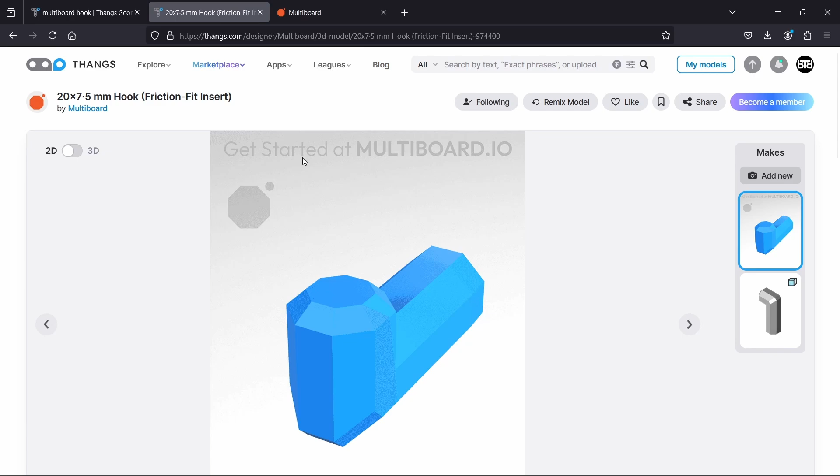I have wanted to get back into the multi-board project for a while now, but I've been sort of stuck with analysis paralysis, which is silly because it's a multi-board. You can always change it. So we're going to go into Fusion 360 and we're going to remix some things today. And so to start with that, I need a hook. I need the backside of the hook where it interfaces with the multi-board actually. So we're going to download that.

And I'm going to combine it with an SD card adapter so that I can store some of my SD cards. So I'm just looking at some different options. This one doesn't have enough cards in it. This one's kind of interesting. That open back slot is interesting. I'm not sure if I want to use that. I'm leaning towards this one because I've used it before and there are different tightness levels. So I can pick one, go with it, print it, see if it works, and if it's a little too loose, I can come back and make adjustments.

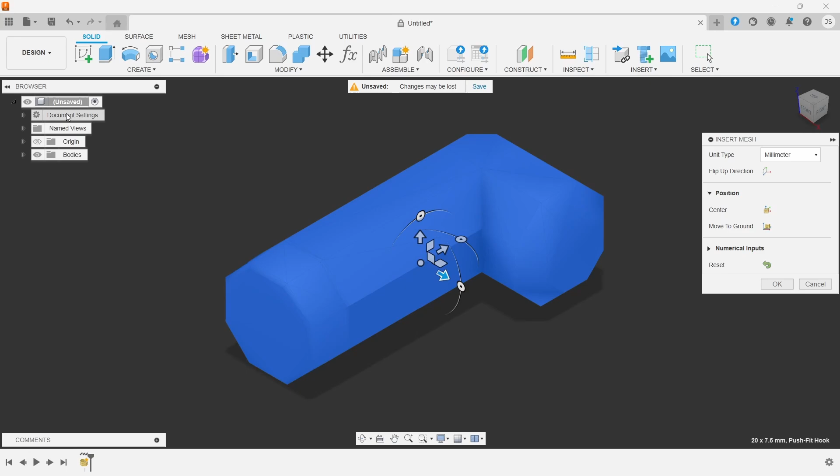So we're going to insert mesh, as we always do when we're trying to bring STLs into Fusion 360. Select from my computer, and we're going to start with the hook. So I'm going to grab that and get that into the workspace. And I always use center and move to ground. And I'm looking at it in the orientation. I want to go into document settings, and I can't while this dialog is open, so we'll do that in a second.

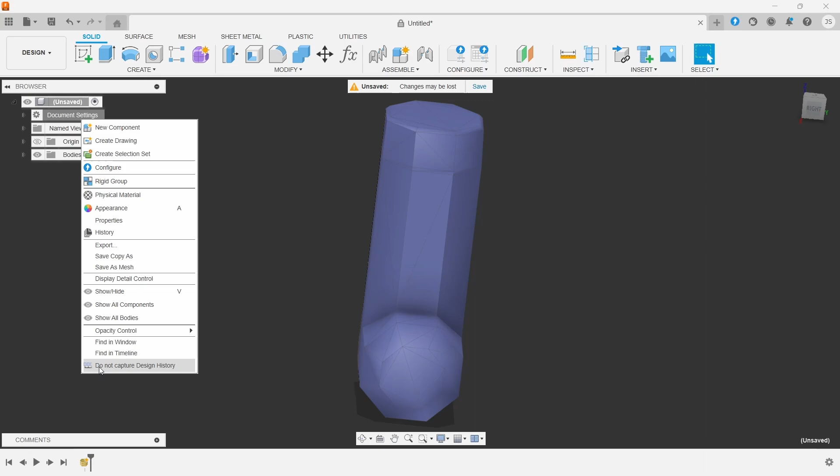Looking at its orientation in space, I already have kind of an idea of how I want this to work. So I'm going to change the orientation of that by using the handles. And now you can see the hook is standing straight up and down, which is what I'm looking for here. So we're going to bring that in, and then we're going to go double check the document settings, make sure that capture design history is on, and you can see that because you have the design history at the bottom here.

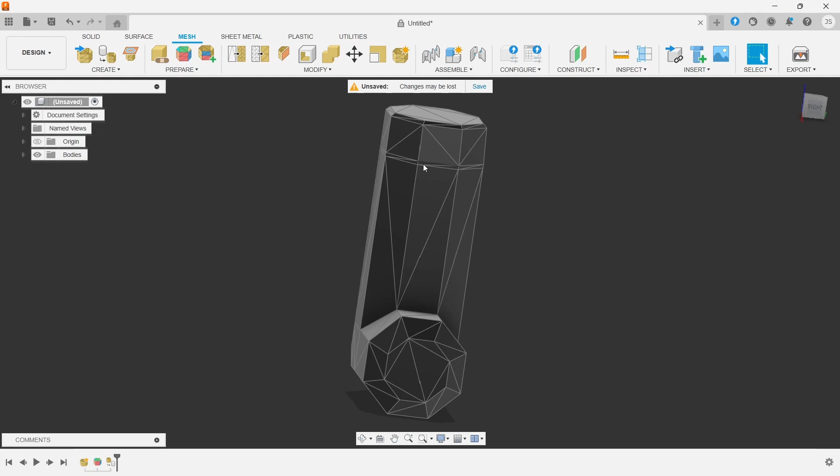So we've got our hook, and now we're going to go into mesh and create face groups. Okay, and then we're going to go into modify and convert mesh, and that's our normal workflow for getting a part into Fusion 360. So now I can edit it, I can cut things off, and I can do what I want. This little feature here is about how far it should push in to the board. If I recall correctly, that's how Jonathan designed it. So I'm going to use that as a guide for how deeply I'm going to cut this thing, because I want it to be fairly close.

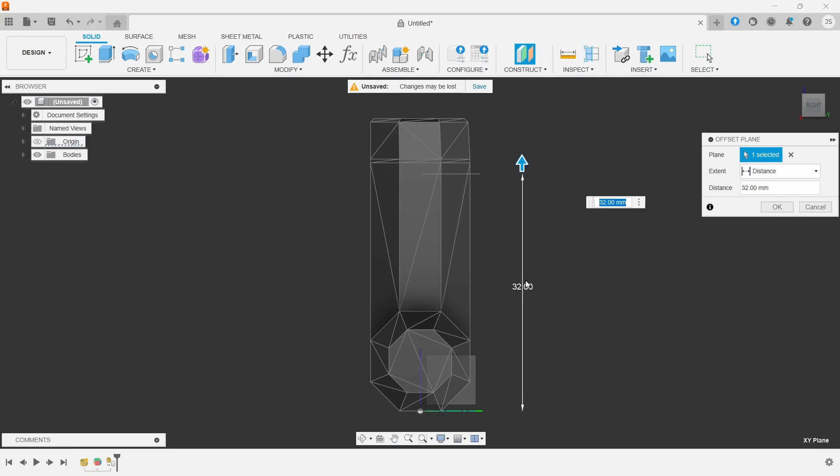So there's different ways I could do this. I'm going to start with an offset plane just because it makes it super easy to modify my depth of cut in the future. So we're going to get the offset plane and just kind of look at it and say, that's probably close enough. That's about where I want to cut it. I could cut it from the side as well, but I feel like the offset plane makes it easier to adjust. So we're going to drop a sketch on that offset plane, draw a box, finish sketch, super easy.

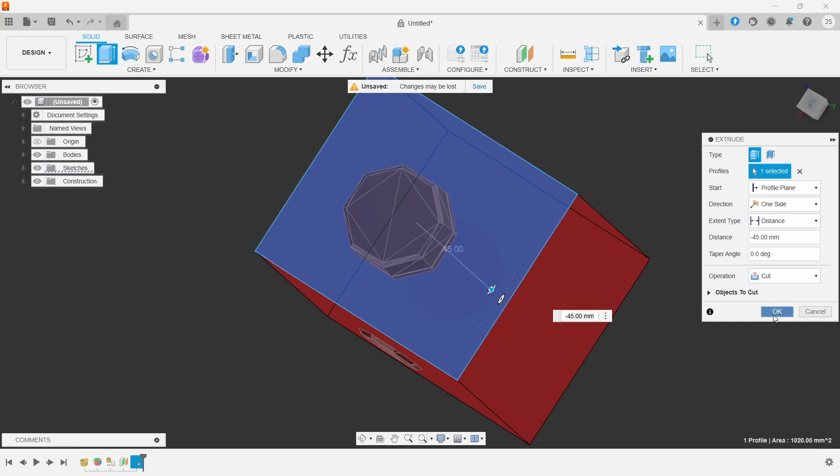Remember, we're going to bring the part in, and then we're going to modify the part by adding things or cutting things off. Here, we are cutting things off. So we're going to go straight to cut and grab that and pull it down. You can see I've made a mistake because that part I want to get rid of as well. That doesn't need to be there. So we're going to go back to the sketch. We're going to grab the side of the sketch and just move it over. I'm not even dimensioning anything. I'm just making adjustments, scooching things where it needs to be until I get what I want.

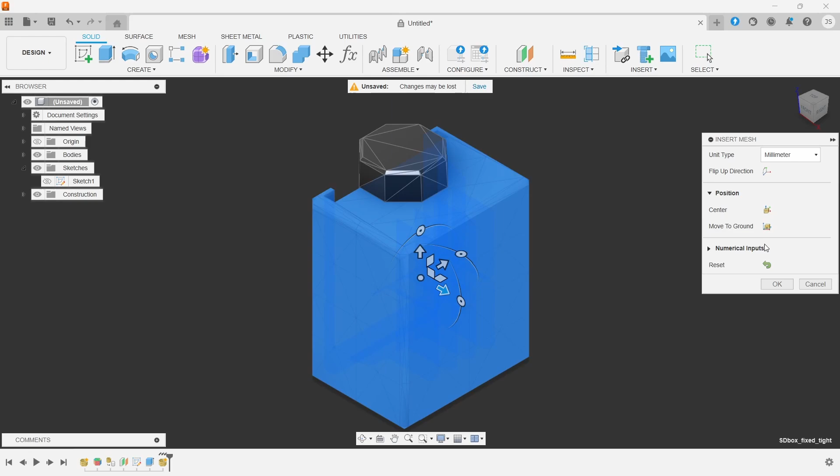So we have the part that's going to insert into the multi-board separated out, and we can now work on it. So time to insert mesh, and we're going to go back to select from my computer, and this time it's going to be the SD box fixed tight. So center, move to ground. I'm looking at it. I'm looking at the relative positions. I'm going to use these handles, and I want to look at it from the top to see how deeply it goes into the box.

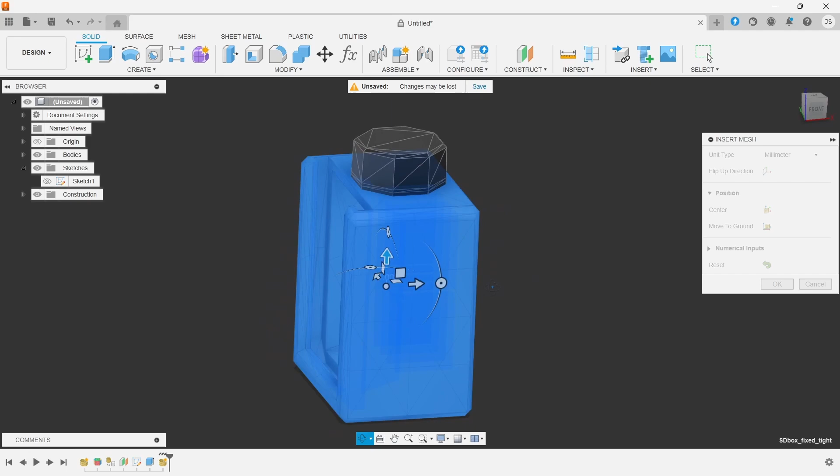But we're going to grab these handles and move it and adjust it and tweak it until it's just where we want it. So we just kind of look around it and see how it sits. You can see that it's sticking through it. So just a little bit further down. That looks pretty good. It's not quite what I want. But you can make additional fine adjustments to this if you really want. I think that just needs to be a little bit different. I want to make sure that there's room for that card to slide.

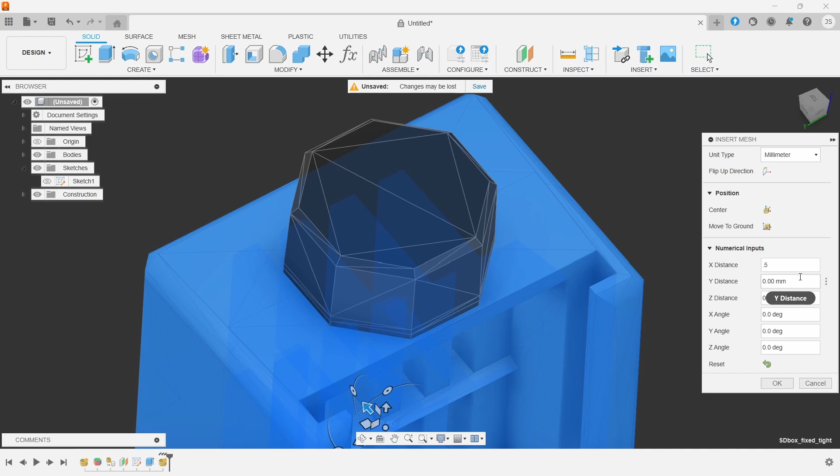That's too much. So we're going to go to numerical inputs, and we're going to make a more fine-tuned adjustment here. So by moving it, I can see that the X distance is moving. So I know that's the one that I want to change, and I just want to make them a little bit closer together. I'm trying to get that post more centered up in the box as much as possible. And that looks a lot better. I like that.

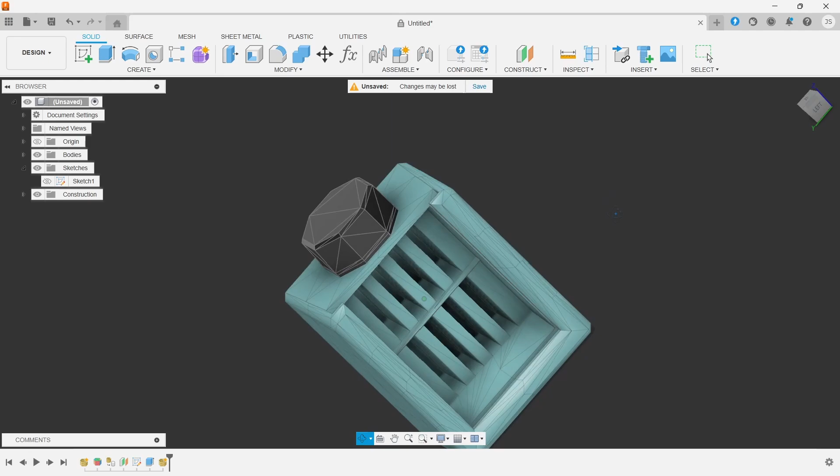That'll work. So here's our post, our box. We've now got the two in the relation that I want. I do want to make some modifications to the box as well. And my thinking is if I print it in this orientation, when it's installed on the board, it will capture the SD card, which I think I like. But another way of doing it is flipping the opposite.

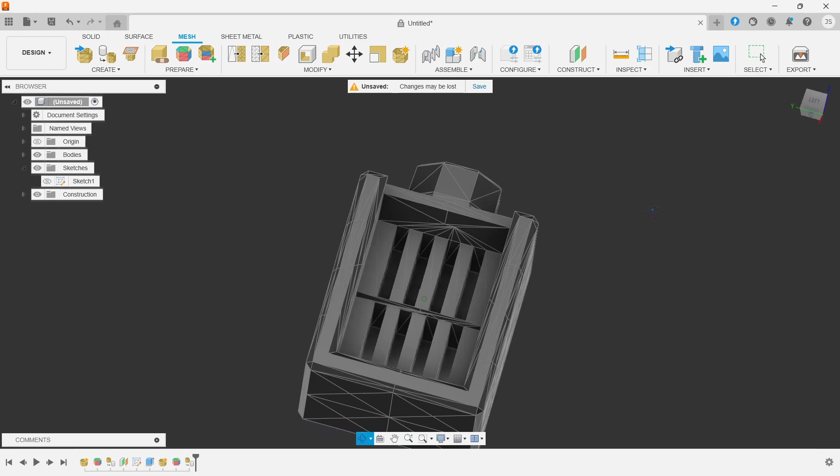So we're going to go ahead and take the SD box and fully bring it into Fusion so we can start editing it. So now you can see that it's changed colors and it's now an actual part in the design history where I can start cutting things off of it and so on and so forth now that it's positioned where I want.

So what I'm looking at is there's 4 slots by 2, so it's 8 slots in this thing, and it looks to me like it can fit 10. And I would like to have as much storage capacity in these things as possible. Why not add 2 slots? That would be cool. So we're going to start with the inspect tool, and we're just going to measure between these and make some notes so that we can duplicate the offsets.

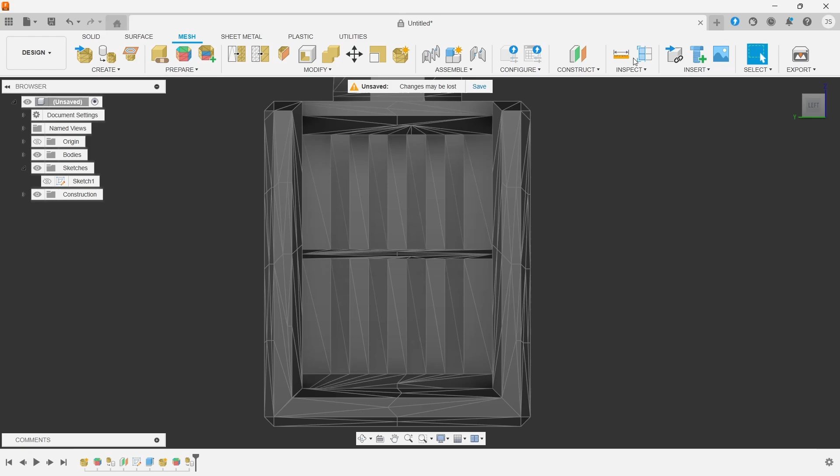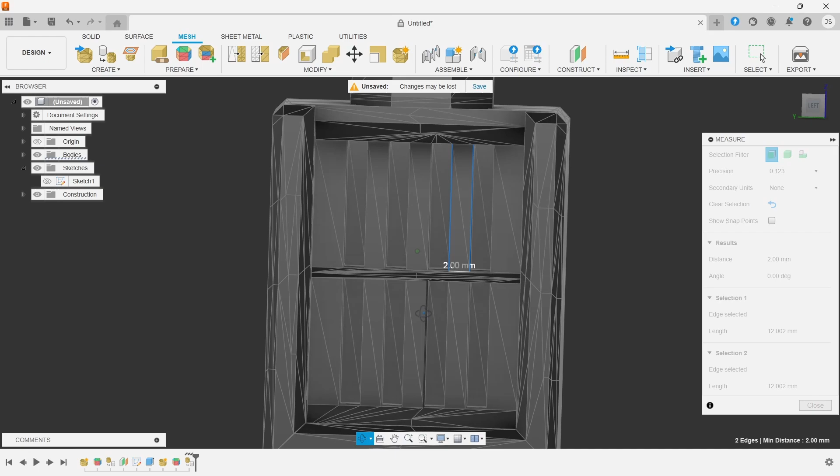So the slots are 2 millimeters wide, and then just for the sake of knowing it, man, this thing is hard to grab onto. There we go. About 12 millimeters in that dimension. And about 2 millimeters there as well. Okay. So I could flip this. Yeah, I can invert how that's done. How deep are these? Or no, how wide is the center section? So that's about 1 millimeter. Okay. Not a problem.

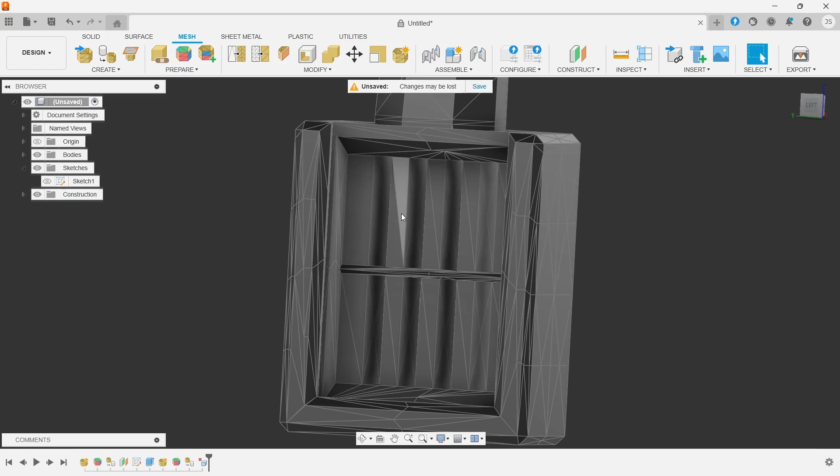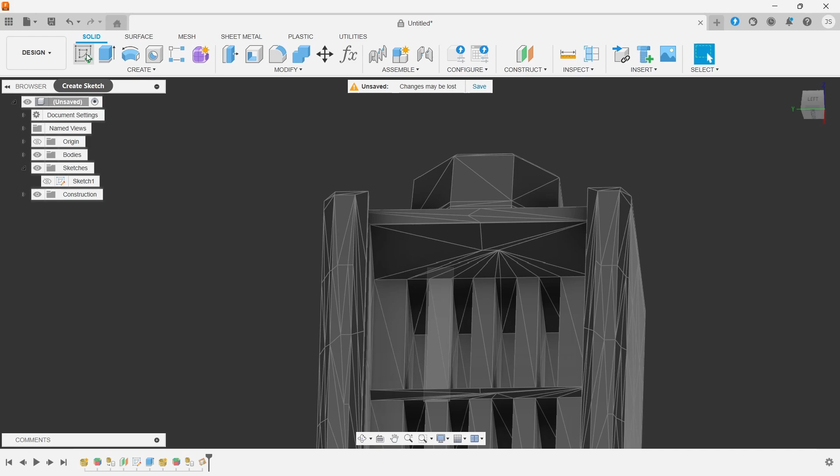Just kind of sizing up and thinking through how I want to approach this. There's 2 different ways. I could cut it all down and then add up what I want, or I could fill it all in and cut down what I want. And I hope I make more sense in a second. So we're going to do 3 points because this is an STL, and therefore it's made out of a bunch of triangles, and every single triangle is a 3-point plane. So if you make a plane of 3 points, you'll perfectly match the triangle from an STL. So that tool is often useful for that purpose.

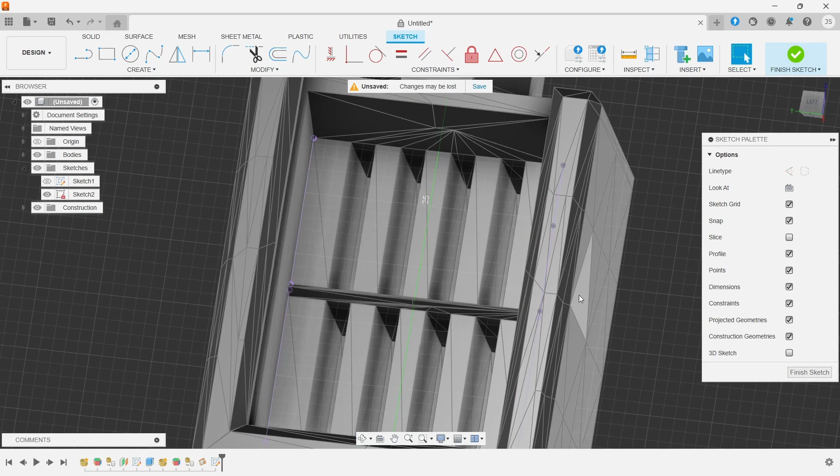So what I'm going to do is I'm going to fill in the space, and then I'm going to cut out what I want. So that'll fill in all these gaps. I could probably delete all of the faces and so forth, but anyway, so we're going to use P for project and project in the geometry that we want so that we can place the parts. So we're going to grab the line tool using our projection geometry and start filling in the sketch. This doesn't have to be precise at all because we're not doing a precision cut. In fact, the projection at the bottom is actually a little bit off, and it's not quite right.

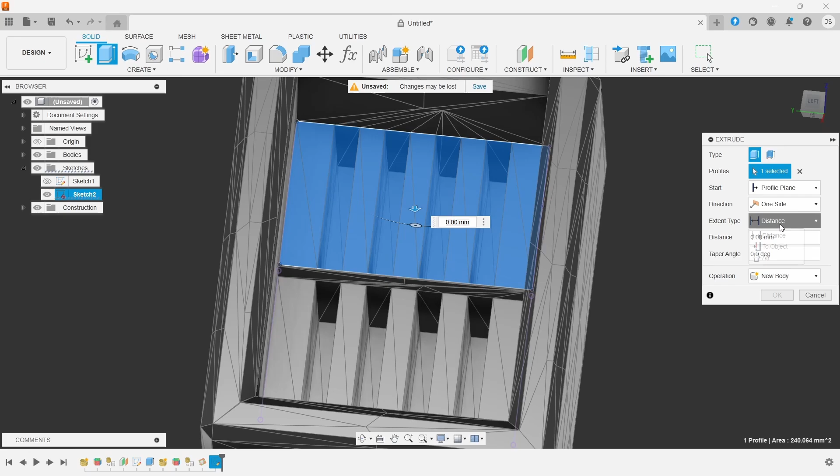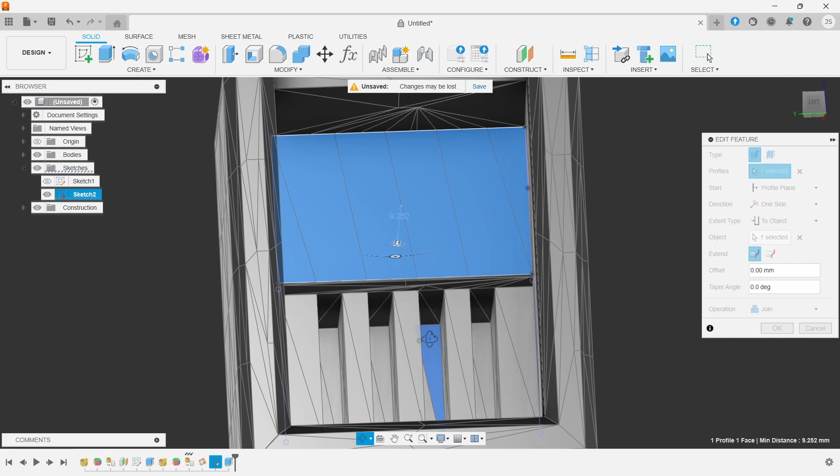In order to just make this easy, what I'm going to do is do it in 2 steps. So first off, I'm going to set up the extrude to object, and I'm going to use this bottom so that it doesn't interfere with it. And yep, that's all the way down. That's one way to cut a pocket. But I don't want to cut the pocket. I'm gonna do the join. We're gonna go down that path, and then we'll cut in what we want. Yep, that's the way to do it.

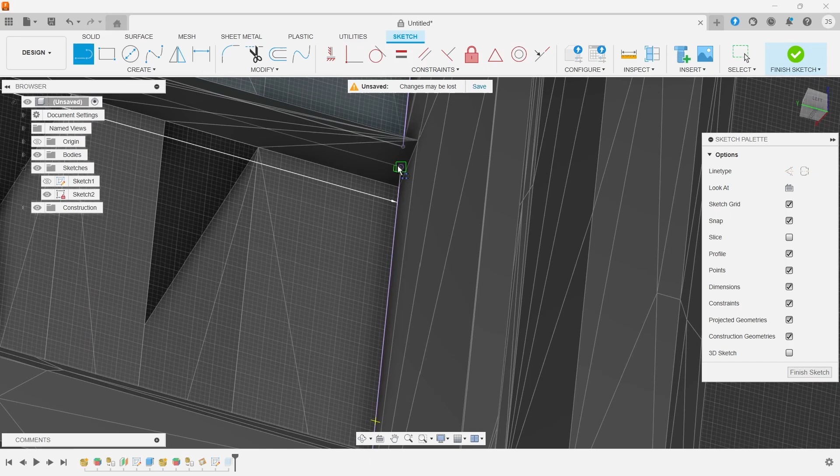So now we go back to our sketch, and the depth of this has already been determined, right? So it makes it just a little bit easier. And like I said, notice how this is actually cutting under this, whereas if we cut out that would create all kinds of problems. But since we're building it up, we're filling in the gaps, it doesn't matter that those projections are not really what I want. So it's fine, I can live with it.

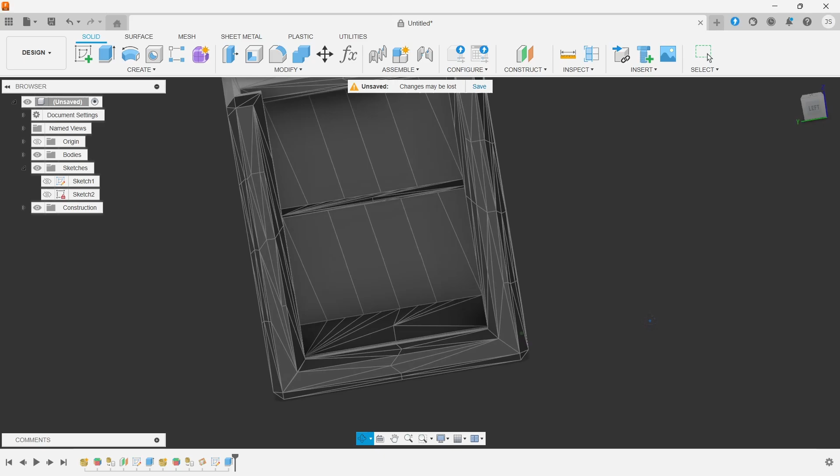So we're going to finish that sketch, and then we're going to go back into the extrude feature, and we're just going to add an additional part to extrude. And that's just a fast, easy, quick way to get all that in, and now we've filled in those gaps, and we have that more solid space. Once again, if I wanted to, I could go in and simplify and delete a bunch of faces. I'm not going to mess with any of that.

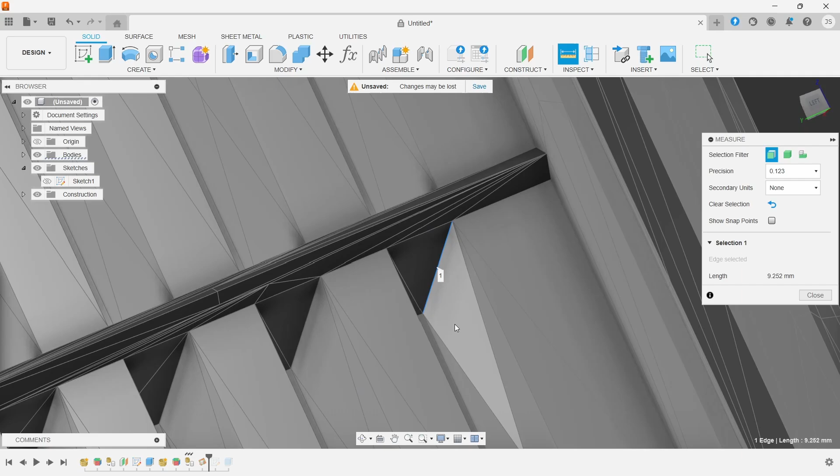One of the cool things is, because I have the design history, you can move back and forward. So I'm checking the depth here, and it's a weird depth. So whoever designed this probably designed from the bottom up and not this dimension, because he probably didn't cut down like that. So, no big deal. So now I'm going to design a sketch onto that face.

And my goal here is I'm inverting the pattern that was there. So where there was a rib, I'm now going to make a pocket. And where there was a pocket, I'm going to make a rib. So I've projected geometry, and now I'm just trying to create a center line and change that to construction.

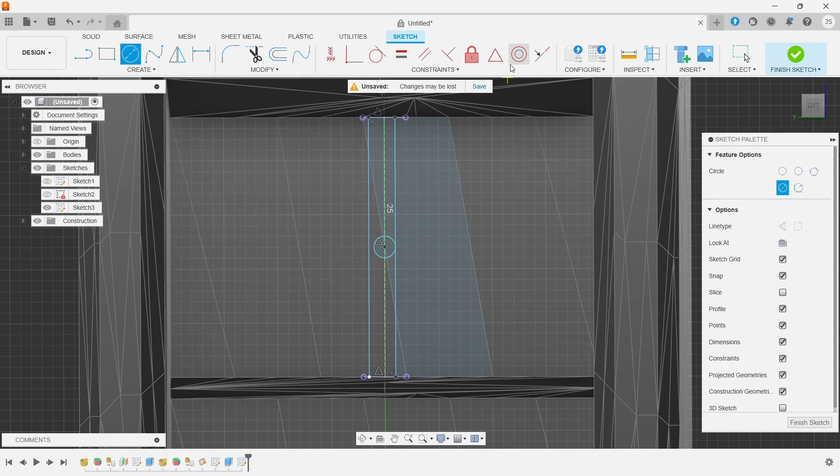And we're trying to fill in these lines, and since that is bisecting the center of the part, what we want to do is 2 millimeters off of this. And so I'm using one of my favorite tricks, which is using a circle, because you can do a centered part and mirror and all that, but the circle most of the time is just faster. So you put the circle on the center part and then set the outsides as tangent, and now you know that it's centered on that construction line and it's exactly 2 millimeters wide, right?

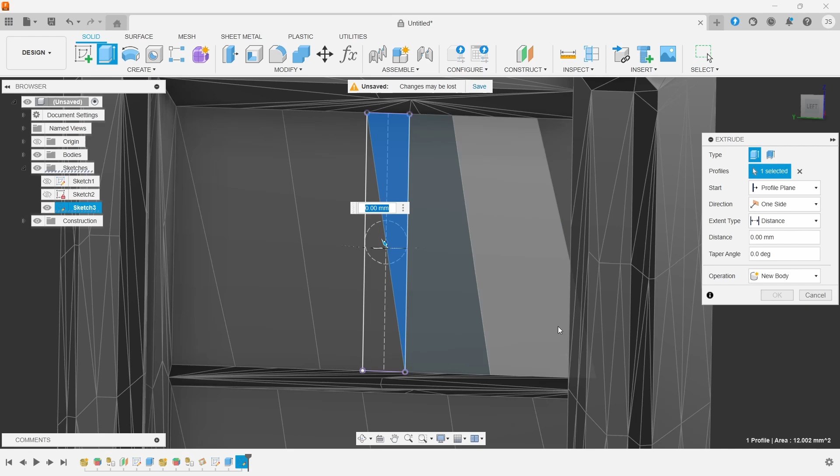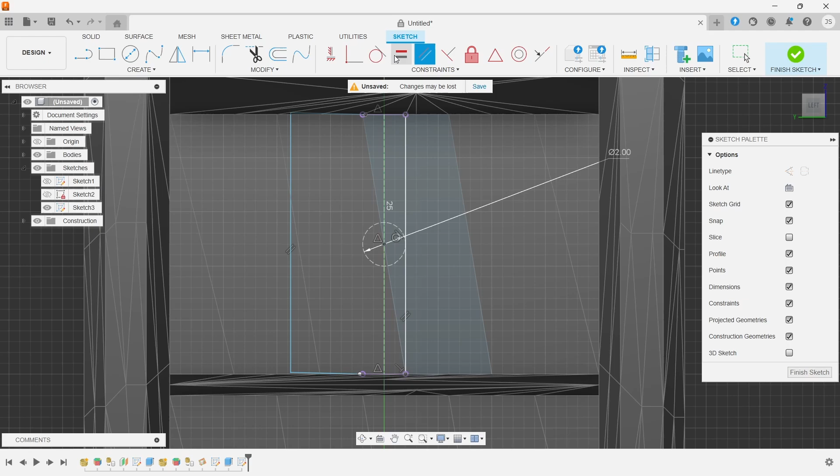And so I'm going into extrude, and this geometry must not be closed because I'm not able to pick up this other part of the geometry. So when I go into the extrude, it's not being successful. So I'm going back in and making adjustments to try to find where I missed it, for lack of a better term. So we're going to delete that, add this back in, reapply our constraints, make sure that they're parallel, make sure that it's tangent, and then we'll see if we can extrude the sketch.

Still didn't fix the problem. And sometimes that's the case. It looks like it should be fine, but it's not. That lower left corner, and the top doesn't look quite right either. So we can see the problem when we zoom in. So let's go back into the sketch. Oh, zoomed in way too much. All right. Zoom in. We're going to do a coincident. A little closer. Let's try the coincident again. Just click, and there you go.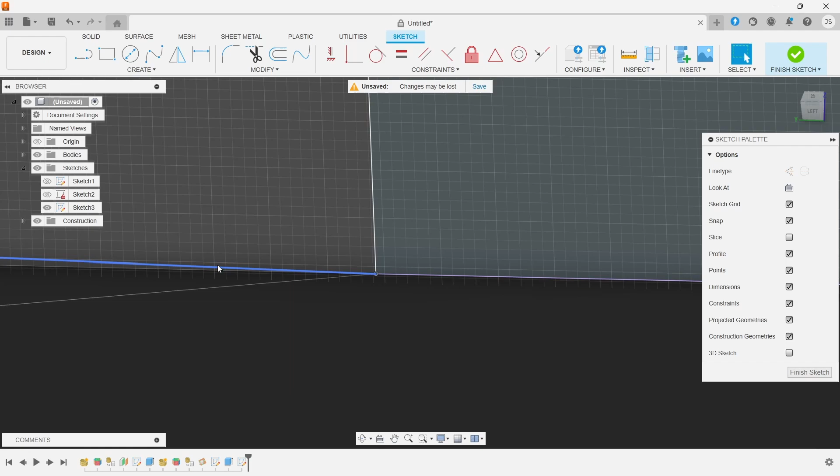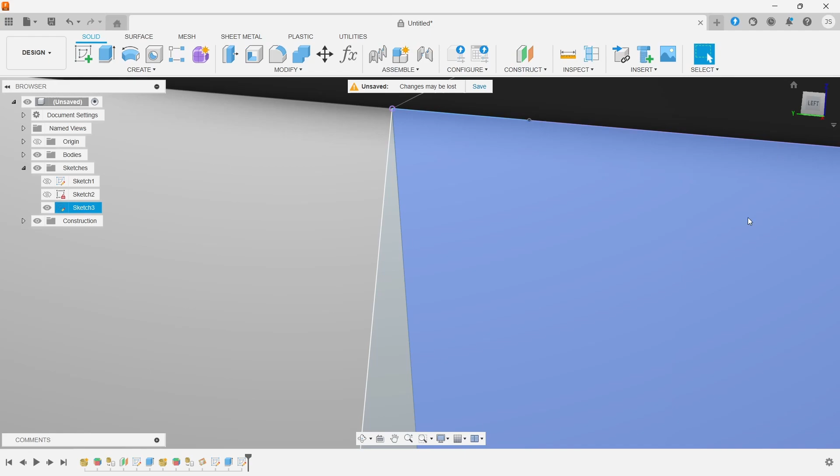Okay, so that part is no longer needed, so we can just get rid of that. And that looks like it's filled it in. It does seem to be filling in. But let's take a look at this anyway. And that is not quite a right angle. So let's go ahead and fix that while we're here. That looks better. Okay, so now we've fixed that the line was not closed, which was preventing us from extruding, and that should allow us to extrude it now.

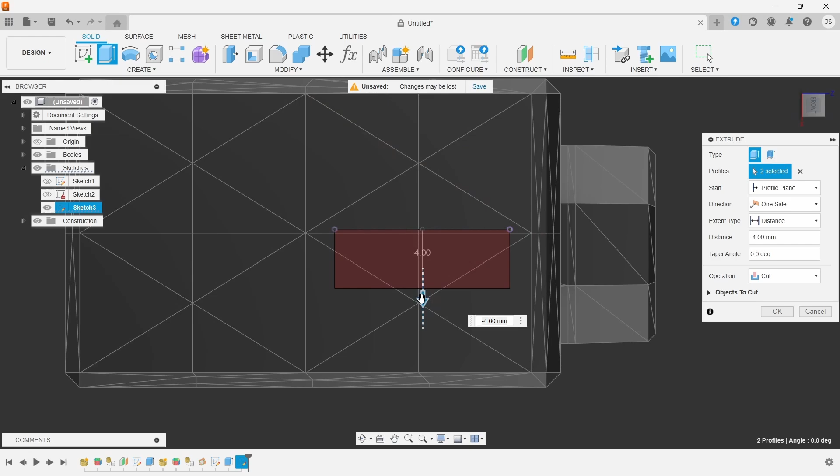So let's go back into the extrude. We'll pick up our part, and that is the full face that we want. It's 4 millimeters wide, and it's kind of cool. You can see how this extrudes down into the part. So let's just reorient, and it was 9.2 if I recall, or 9.25, something like that.

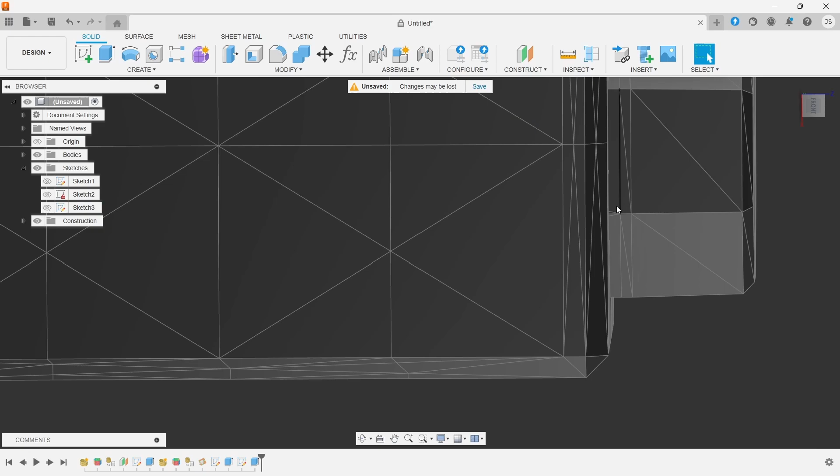So it would be nice to be able to do an offset from the outside, but normally it's an offset from the starting position. So we're not going to mess with that. We're just going to cut down 9.2, but it needs to be negative 9.2. So let's go back into that and flip it and make sure that it's cut. Okay, so now we have a slot, our very first slot. Well, first and only slot at the moment.

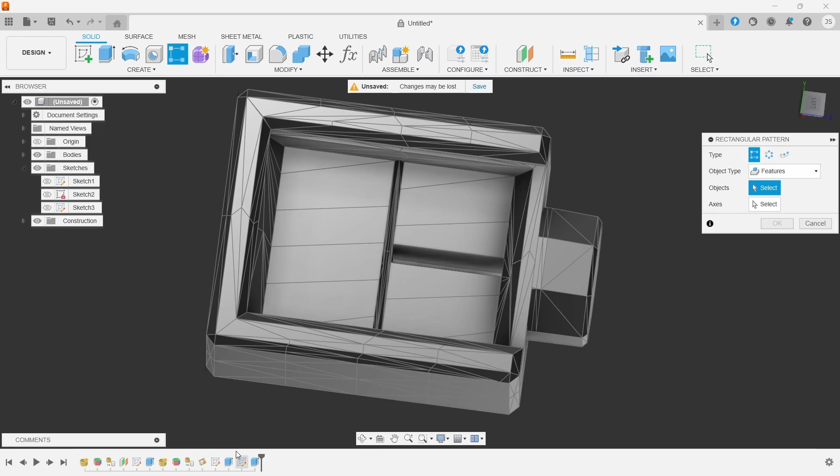So what I'm going to do now is create a rectangular pattern of that feature, that extrude. So I've got object type features. I've selected the feature that I want, which is this slot. I'm going to select an axis for it to cut in, and that is cutting correctly. The other axis looks off. So set that to symmetric, and they're both set to 3.

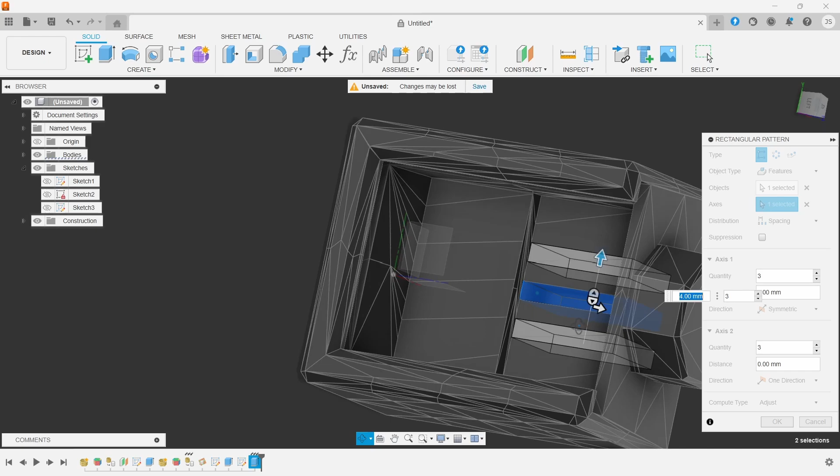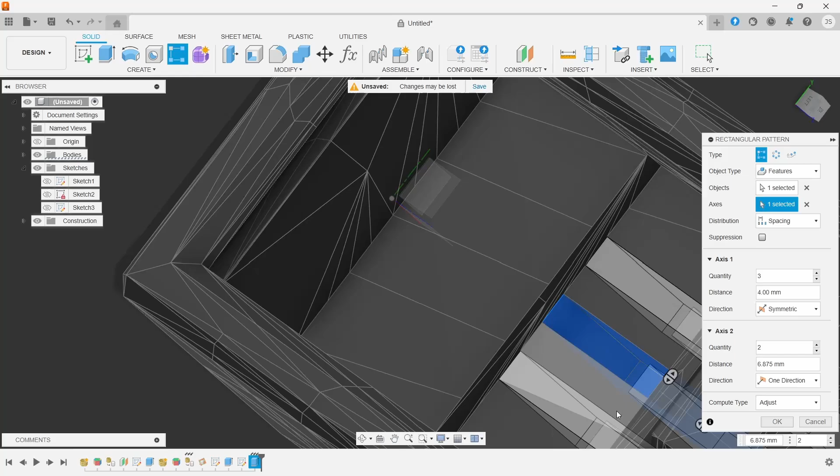So that is not what I want. That is coming in at an angle, because the axis that I selected was that end, and I guess that end could have a rotation component to it because of the face that's attached to it. So we're gonna have to ditch that axis. It's not working. Let's see if selecting here works better. We're getting somewhere. Still not quite right. Let's try again. Now that looks right. That's what I want. So that edge axis looks better.

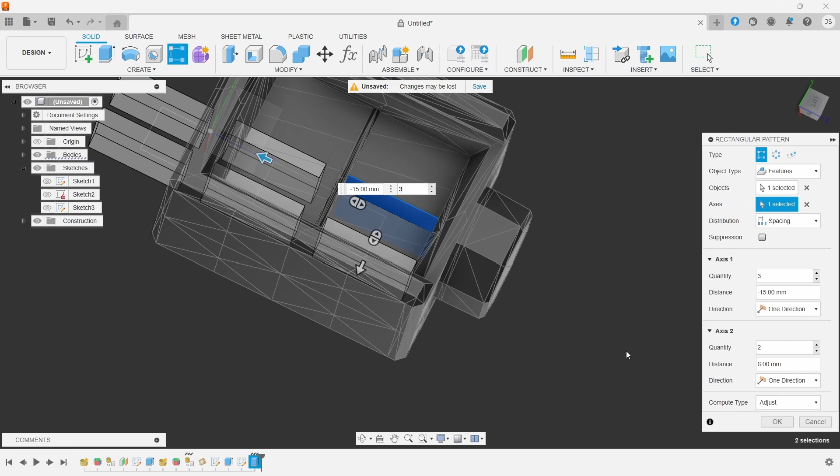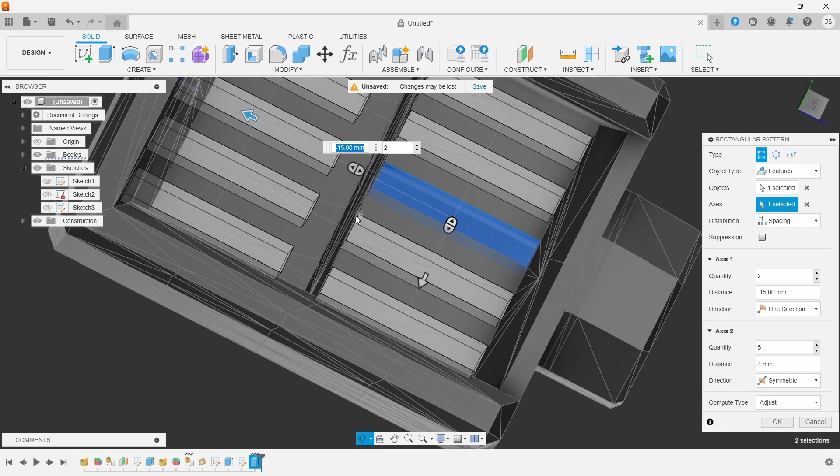Okay. So let's flip these. And I want, let's see here. No, that's not the correct axis that I'm working on. That needs to be 2. And that one should be 5. And that needs to be symmetric. So now we're getting closer. And they're only 2 millimeters apart, so it's probably 4 millimeters center to center. So that looks right. And then this one, they were a millimeter separated. So those all look like they're where I want them.

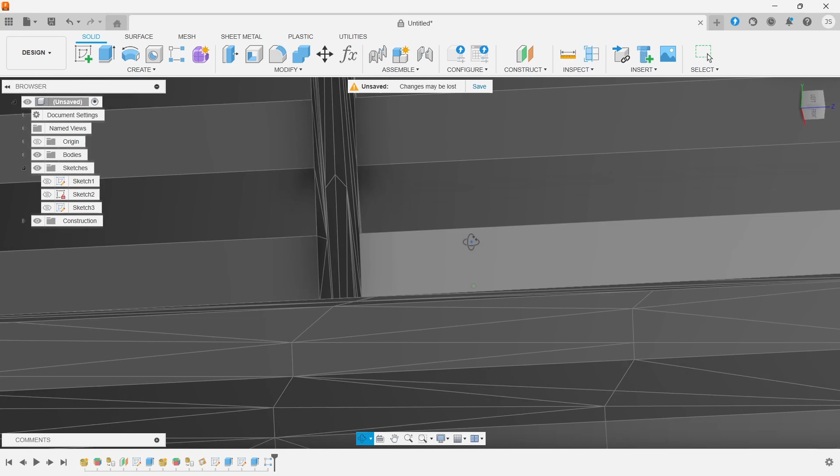So overall, this is looking like what I was trying to get to, which is now we've increased the capacity. There's a total of 10, and the cuts look nice and clean. It really looks like it was a natural change to the original one. So we're going to do a Boolean join, combine these two parts, and now we have a single part that is printable as a single part.

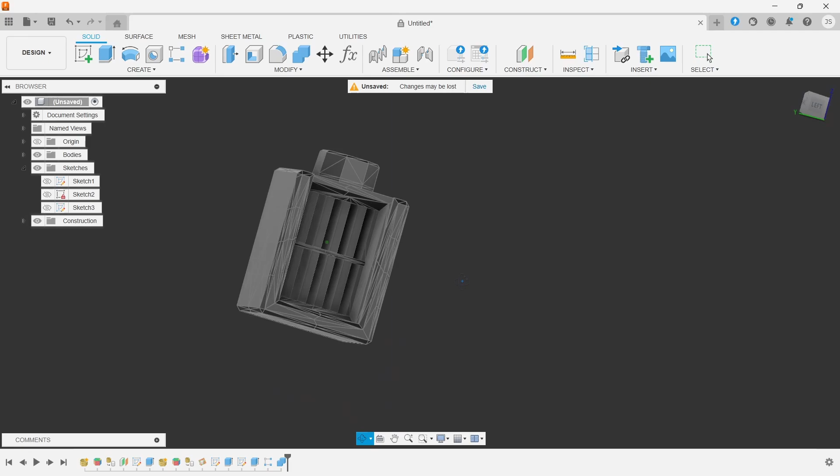We're not trying to do modifiers or any of those other tricky things, so we just need a single, clean, entirely joined part. We have our reworked center section, so we have space for more SD cards here, and all that we've done is flipped what were slots and turned them into ribs and vice versa. So we're going to go ahead and save the file. Finally, I should have done this at the very beginning and not at the very end.

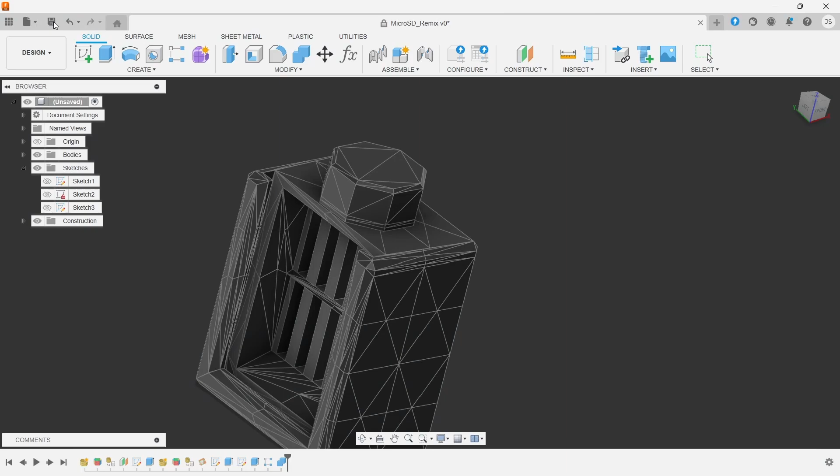Oops. So, but all right. So we've got that saved out. Just looking over the part, everything looks like I want it to. Looking for any kind of issues that'll cause printability problems. We want to print it up standing on its end. That's how the original was designed, and we have a single body because I've joined the two bodies together.

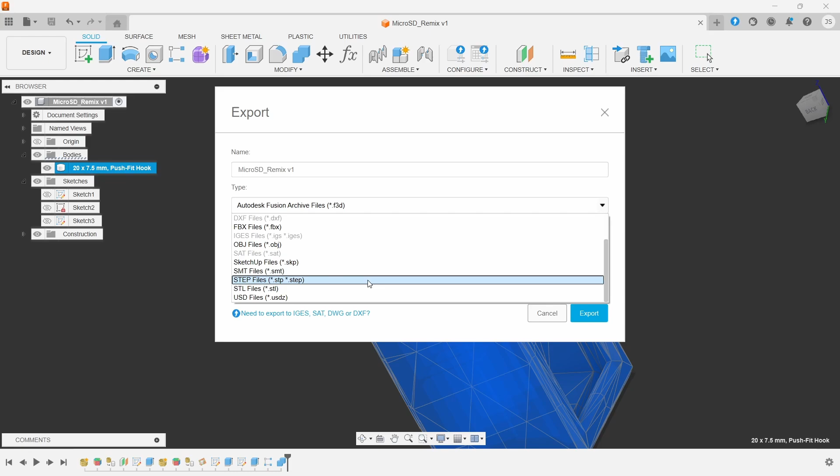If you want to do an STL, you do save as mesh from there, but we do not want to do it as an STL. We want to do it as a step file, so we'll go to export, and you have to scroll down a little bit to get to step files. So we'll go ahead and export that as a step file and get that over to our slicer.

I recorded this a little while ago, so that was when I was using Bambu Studio. I switched over to Orca Slicer. I've got a video on that. Check out the cards. And I'm really happy with Orca Slicer.

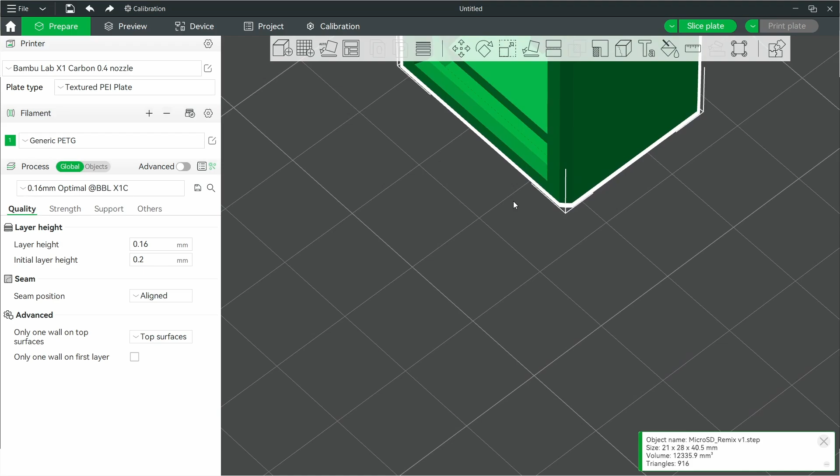Since we got the part into the slicer, I always like to look around the part and look for any kind of problems, anything that I would have missed, any issues that need to be addressed before you commit to a print. I'm looking for overhangs and stuff like that. The overhangs and bridges and things on this part should be fine, and there shouldn't be any issues because of the orientation.

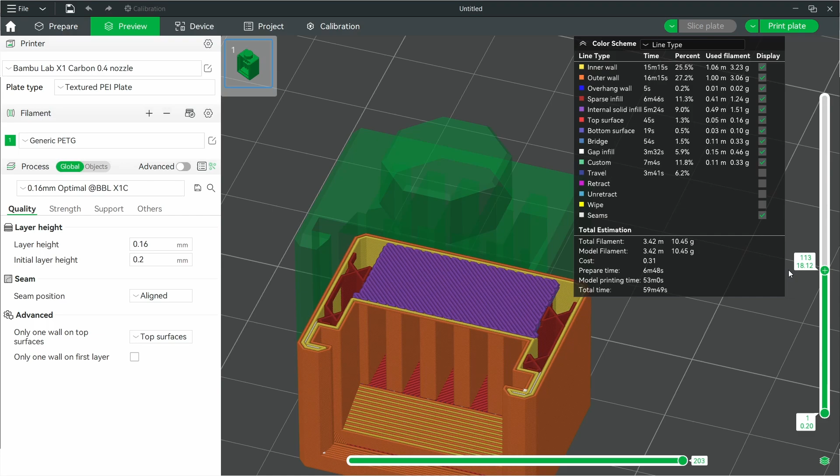So just checking to make sure that there's no parts on the build plate, and go back into slice the part, and then after slicing the part, I like to look at the preview and look layer by layer for any kind of problems, things that aren't going to print well. And those bridges shouldn't be an issue because they're tied on both ends, so even though it is a bit of a steep overhang on this part, it shouldn't be an issue because of the overall part geometry and the fact that they're not just overhangs, they're also bridges. So none of those should cause an issue, and it should print well.

And then the stud on the end that plugs into the multiboard will also print well because it's on the top side of the part. Even though that stud was originally designed to be printed on its side, it shouldn't present any issues or problems moved into this orientation. Especially because strength is not such a big deal for this part.

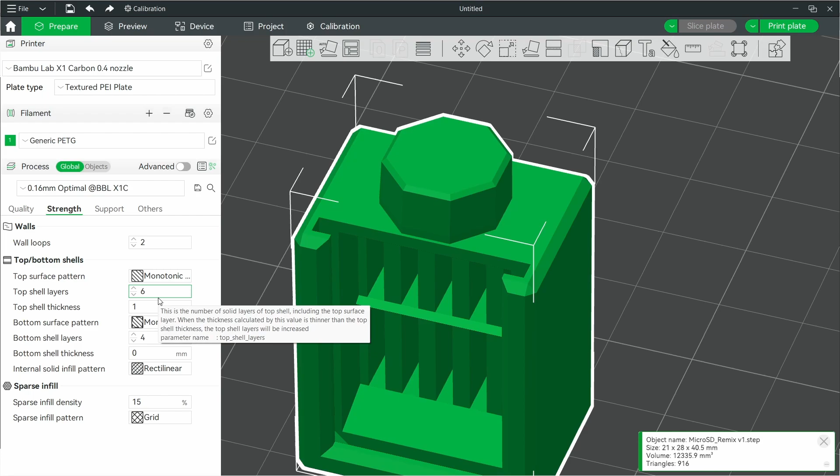So I prefer cubic, and so I'm just looking at the print time, deciding whether or not more infill makes sense or not. If it's not much of a penalty, in this case it really doesn't make that much of a difference. I'll just up the infill just a little bit. It shouldn't have a huge impact on the outcome. So we'll just reslice that. It's pretty close. It's a few minutes different.

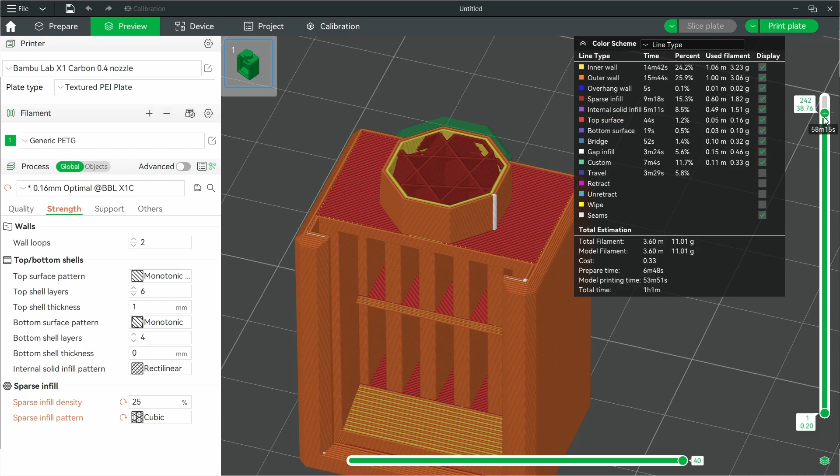So we'll go with the higher infill density, and we'll go ahead and print this part out as it is. And then after getting it in hand, see how we like it, see how it feels. So kick off the print in black PETG, and there you go.

So I really like it, and this is going to be how I store my microSD cards. You can just stick them on the multiboard, and then if you want them or need them for any reason, you know exactly where they are. You just grab them and pull them off.

I really enjoy these kind of remixes and designs, so I'm going to be doing a lot more of those in the near future. I want to fill up this multiboard. I'm tired of looking at it, and I just got to get stuff on there, and then I can rearrange it and readjust it. That's the whole point of a multiboard. So why am I overthinking it? Because I can overthink anything.